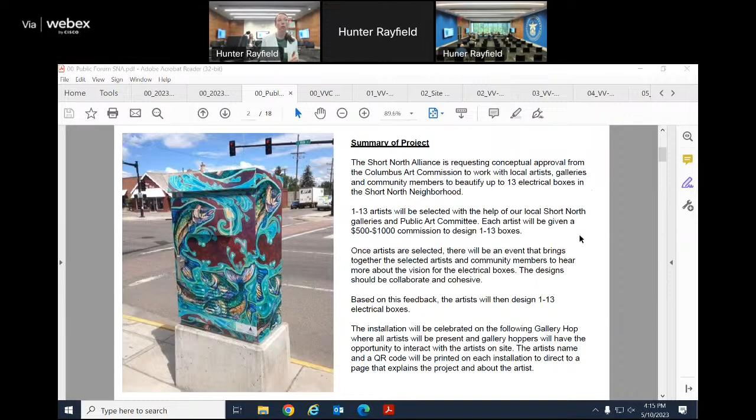We are wrapping the electrical boxes on the Victorian Village side of High Street with vinyl, similar to what you see on Parsons and in the University District. So far, we have selected 13 artists. We will match them up with a specific electrical box and have them designed for that. Then our Short North Public Art Committee will review those proposals, and we hope to install later in the summer after the Columbus Art Commission approves as well. Great, excited.

How do they go about aligning what box goes with which artwork? Here's my take on it: I think it's a wonderful idea. I think art is great exposure, but you almost want those things to go away, not become something bigger and greater than they already are.

To answer your first question, we looked at the application. We put out an RFQ for artists and got about 75 artists amongst 5 different calls we were doing, many for the out of the box project. We looked at what they've done in the past and matched it. For example, we are wrapping a box in Goodale Park, so we selected an artist that does more parkscapes and matched it there.

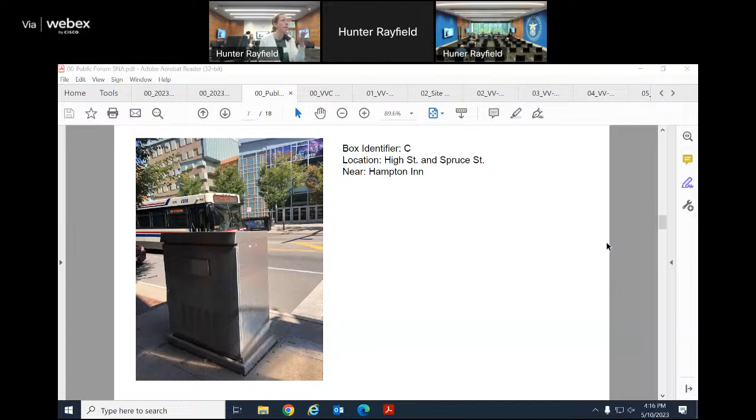To answer your next question, I completely hear you. Unfortunately, they become places for graffiti and posters and stickers anyway, and Parsons and University District have found that this is a good deterrent. People stop graffitiing and putting up stickers if the vinyl is there. It's also extremely easy to remove graffiti from that vinyl wrap.

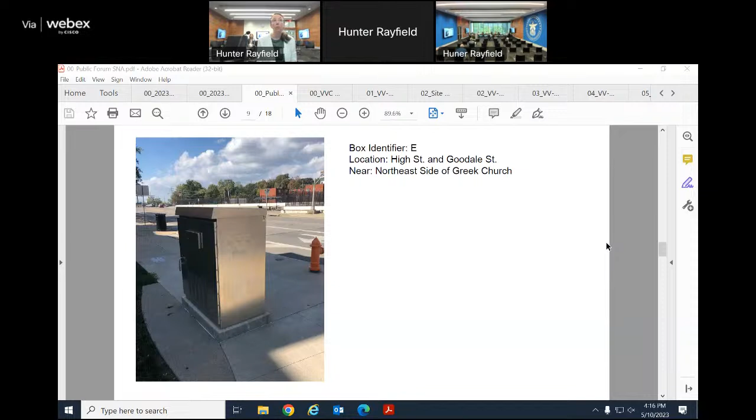Is that something that, if successful, would start to blend into more residential areas with improvements that have happened, like along Mill Avenue where several have been introduced? Absolutely. I can't speak for the city, but they've been super receptive to this project, wrapping certain electrical boxes. Some are off limits because of how they access them, but these specifically are what they've given the okay on. There's a smaller version too in the University District they've given the okay on. But I think if there was funding to support a wrap of an electrical box, the city would be at the table too.

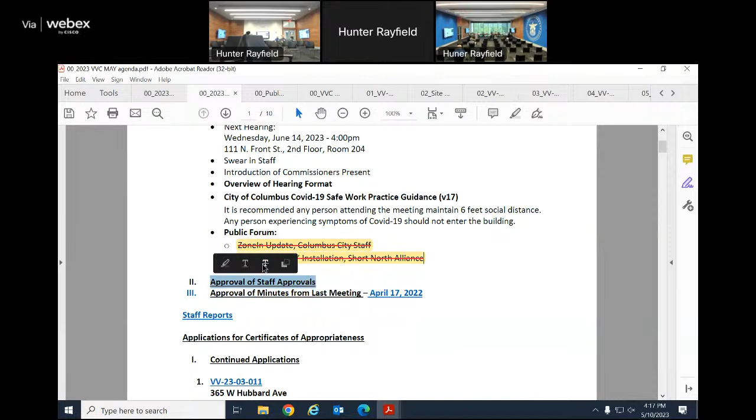It starts on page 7 if anybody wants to follow along. We start off with 781 Park Street, 773 Denison Avenue, 1132 Highland Street, and 115 to 119 West Second Avenue. That's all the staff approvals for this one.

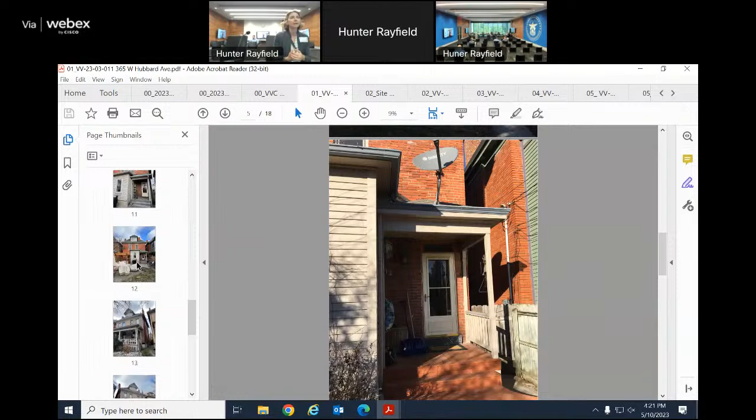Any thoughts or comments from the group? I think staff's recommendation is continuance. There was some discussion last time about its location, responsive to the addition. The addition is now considered historic as well. I think the door type needed some clarity, if I remember our discussions. I'm just trying to prompt dialogue about what we talked about in our last couple meetings regarding the project.

There's the separate issue with the roof and stuff, which is still not resolved, just to be clear. But I think we had talked about this and said, look, it's just back in the back corner, and we could maybe be a little flexible here. They address the type of door by putting in the correct type of door, and I think that's kind of where we left it. So as long as we're keeping this separate, I don't see a problem, staff's comments notwithstanding. I thought we were okay with everything, separate from that. Yeah, that's where I thought we left it.

I think the only thing needing clarity is materiality—what kind of brick will be infilled, limestone sills, and things like that—so we do our due diligence on putting in a proper opening. I don't think we really got there at that time. That's a good point. We should probably address that now, so just something to put on the table.

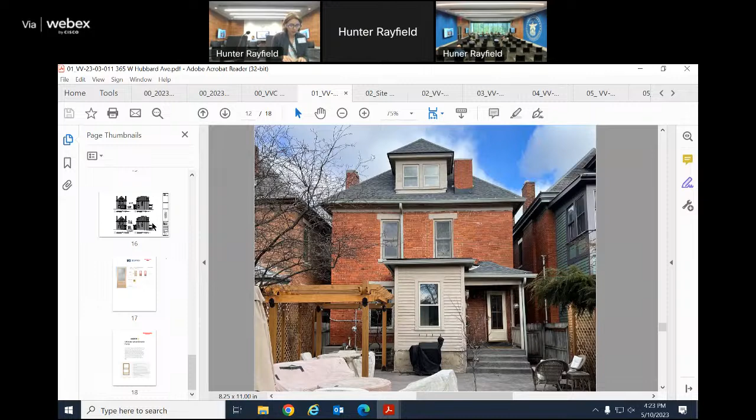Do you want me to go through the specific materials being proposed? That'd be great. So where we're taking the door out, we're installing a new Marvin Ultimate wood double hung window, wood interior and exterior, painted to match the existing. We're installing a limestone sill similar to the existing one, with brick infill beneath that won't be an exact match but will be complementary. The new door being proposed is a 3/4 light wood door. I'm not sure if they're going to paint or stain it, but I don't think you guys really need to worry about that.

Are they going to feather that brick infill, do you know? I have it shown as a straight infill within the door opening to indicate it was an opening that was partially infilled. What do you guys think about it? I'd prefer it be toothed in rather than straight. Okay, we can tooth it in. The brick needs to be close match, as well as the mortar. So I'll note that both the brick and mortar need to match, and it's going to be toothed in. Correct, and that color brick is pretty common, especially for matching.

If we're doing that, is the size of the window appropriate? I assume it's following the width of the door currently, versus if you were punching a new opening—what would the size of that window be? I'm talking about width. Yeah, okay.

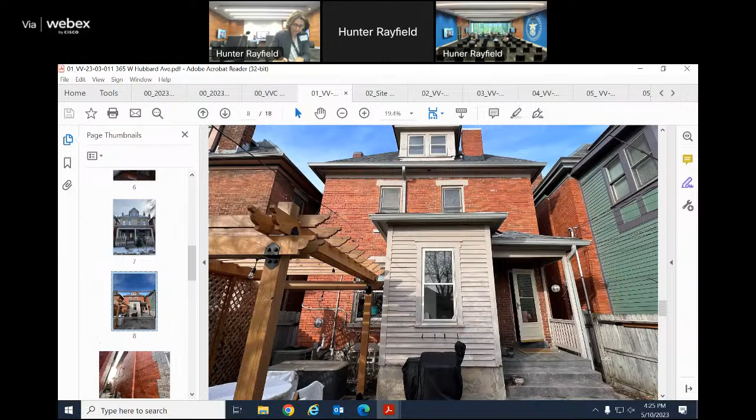All right. Kimberly, do you need anything else in terms of some of these materials for your application? I don't believe so. If it does get moved to an approval, I will need reasons why. Okay, so some of the comments made at the business meeting related to its location, the addition, the current existing addition, things of that nature, I think probably would be helpful for Kimberly.

So can someone move to a vote, or rather a motion? Motion for VV-23-03-011 365 West Hubbard, as submitted with infill brick to be toothed in to blend.

Material, limestone, she already got that. Yes, that makes sense. Is there a second? Second. Any further discussion or clarification? Is there anything to clarify reasoning?

You want that now? I was going to ask for the reasoning after the vote. Okay, that's fine, perfect. So we'll call a vote then.

All those in favor say aye. Any opposed? Motion passed. Now, I figured that would be the case, but I still wanted to go through that. Of course, no, it makes sense. So- thank you for the reasoning.

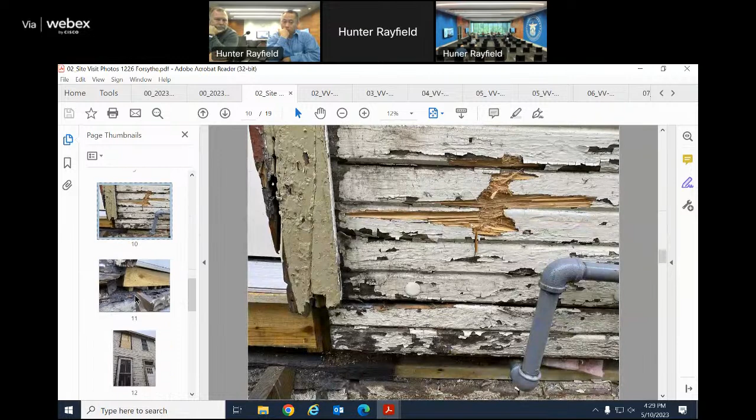gutters were previously installed on the house with straps. There was no fascia board that appears to have been present. Since the gutters were removed as part of the ongoing work at the property, would the commission be okay with replacing the K-style gutters back on, or would placing half round gutters on be more appropriate?

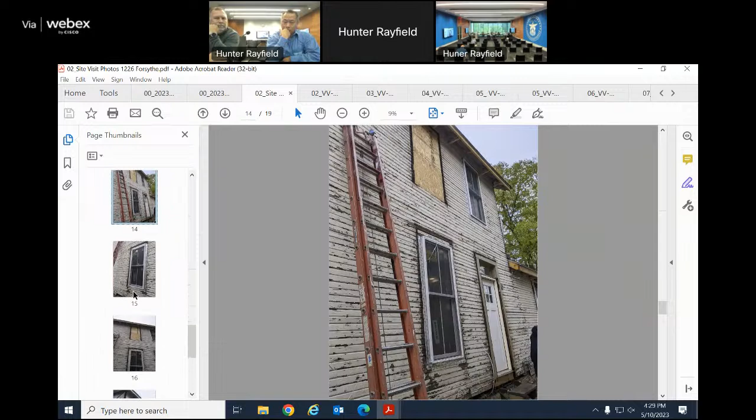Staff does recommend approval of the application with the following conditions: that the wood details on the gable ends, east and west, are retained and repaired as needed; the rafter tails are maintained in their original open condition; and the Hardie siding should have a 4-inch exposure on the horizontal lap siding and smooth finish to match the original dimensions—that's the portion on the main house.

Basis for staff recommendation is City Code 3116.11, standards for alteration, as well as City Code 3116.12, standards for new construction, and the Victorian Village guidelines on siding. That's all.

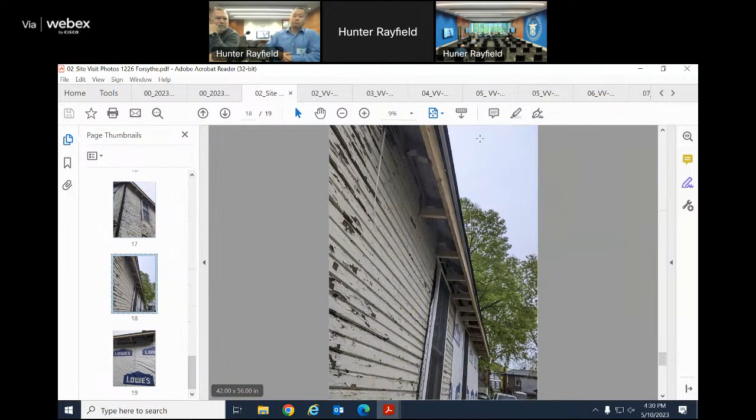Thank you, Kimberly. Can you guys state your names and get sworn in? Darren Shu, the owner. Shad Morris, contractor. Perfect. Do you guys agree to tell the truth, nothing but the truth? Yes. Perfect, thank you. Anything else to add?

It's like we're family now. We've been here so many times.

Of course. The only thing, after our site visit, that I disagree with is the fascia board and the gutters. I know, we had a discussion about it last time. That's the only thing that's really different.

With the addition being closed in with the fascia and soffit, because of how it was built, or how it was approved, it's gonna look so much different than the rest of the house if we keep it open rafters. That's the only concern as a contractor, and the way the house is gonna look when it's finished. It's gonna have two completely different looks, with the closed in soffit and the fascia and the gutters.

The only way it would even remotely match a little bit is if we did fascia on the front side, even leaving it open underneath on the top and bottom of the original house, and just putting the regular gutters. That way, at least the gutters match, and it kind of symbolizes everything matching. If that makes sense.

I'm sorry, it's kind of confusing, but it's just gonna look so much different in the front on that picture right there. I mean, that's all gonna be closed in. That's part of the addition.

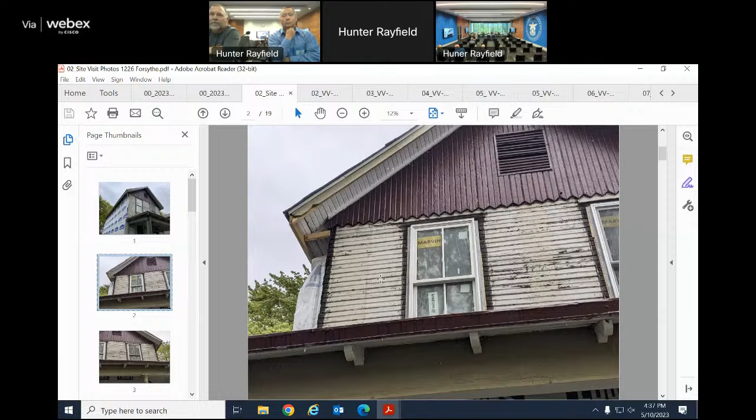What page is that? Page 5. There's 2 photos. That's 5-2. Yeah, the remote - yeah, there's the gutter, so you can see... that doesn't have a page on it. Right, that's what it should look like with the half round.

I don't know, but that one, yeah. So there's just a strap - it goes up underneath the shingles and comes down. Exactly. It's a little bit untraditional compared to maybe what the back and that addition is going to be, but I think that's the intent of being able to get that on the existing structure. Would you feel that's able to be accomplished? I mean, anything can be built, yeah.

It depends on how much he wants to spend. Understandable. So that would be the half round. All right, so siding - siding had 2 parts, one is the front, one is the rear. I think the last time we clarified the rear, it's the 12-inch vertical. Yeah, we got that worked out last time.

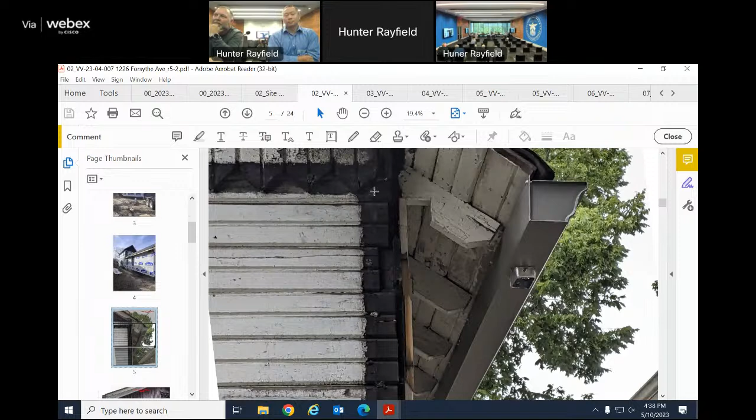Siding on the front now - it seems like from the visit, given the care, the quality, and the conditions of the existing, the recommendation has come to be Hardie board with a 4-inch exposure. So it should have the corner boards. Yes, understandable - so we have the corner boards, we have the trims. And then also, the recommendation is only thinking about keeping the existing...

...gable end siding. So how are you planning on making the transition between that without losing the character of the existing trim? We're actually going to try to cut our Hardie to match that.

That's something we want to keep. We don't want to lose that, we're with you on that.

So we'd like to try to, if we have to, just copy and paste, trace it, and cut the Hardie right up into that. Do you think you can keep the first Hardie recessed from the gable trim, meaning the gable trim would still be proud of that first Hardie board, or will you have to build that out? I think that's a 3/4 inch piece right there, on top. So I'm hoping, if not smooth, that first piece has a little bit of a ledge coming down like this, and we can get that piece up there tight so it's smooth with what's up there now, is what I'm hoping.

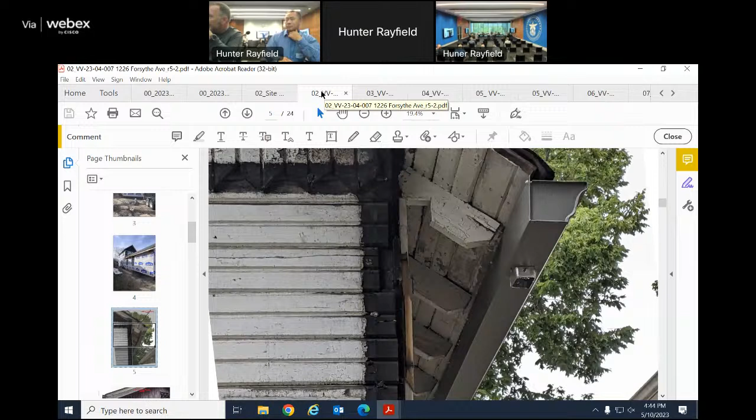I just have one question. Where, as far as how the plans were drawn up, is the break point between the addition? So where the two-story comes down, that's our break point between horizontal and vertical, right? That's correct, where the original house versus... Actually, that back part was original too, because we have to do the basement too, but I think that would be a better break point right there. Okay, I just wanted to make sure, so if I build this thing and then you guys say no...

We just want to make sure we have open soffits halfway down. Yes, okay, perfect. So, are we saying the original house is having the open eaves, and the two-story part of the house will be all regular open with gutter, but the one-story portion can be all closed? That's perfect. Thank you for saying that.

Yep, sorry, motion as well. Okay, alright, I just want to make sure we knew exactly where the break point was. Absolutely, alright, so is there a motion? Or a motion part A. Yeah, we want to start on the siding on the house. We can do that, we can break it down by A, B, C, and D. That's fine from that standpoint.

So what has changed from what was proposed? Siding wise, no problem. I think the clarity is that now we're going, based upon the site inspection, with Hardie board. But that's what's in the application, that is correct, so that would be as submitted, with 4-inch exposure, that's as submitted. I think the only thing that has changed is the addition of corner boards. Thank you so much, Melinda.

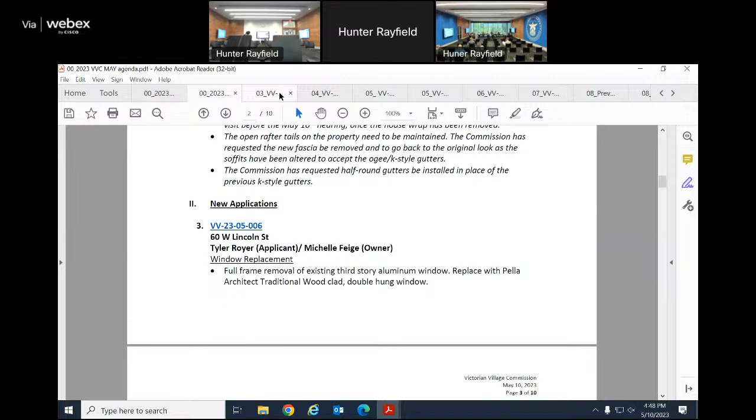Application number 3 is 60 West Lincoln Street. This application is for a window replacement, a full frame removal of the existing third-story aluminum window, replaced with the Pella Architect traditional wood clad double hung window. The replacement window would have a tan exterior with a half screen and new cedar window trims to be replaced. I've included comments from the July 13, 2022 hearing for the commissioners. Commissioners at the business meeting requested cut sheets for the previously approved window for Victorian Gate, which is the Pella Impervia.

The applicant has provided the requested documents and they have been included with the meeting materials. The Victorian Gate condominiums are a non-historic structure or series of structures which have an agreement in place, only having the Pella Impervia windows previously approved for use. The Pella Impervia windows are a fiberglass composite exterior and interior, while the Pella Architect traditional wood clad are presumably wood. The Pella Architect series reserve are the Pella wood windows that are listed on the approved windows list. Is the commission okay with the difference in materials between the two windows?

Staff recommends approval of the application with the condition that the replacement window is from the approved windows list. Basis for staff recommendation is City Code 3116.11, the standards for alteration, and the Victorian Village guidelines regarding windows and doors. Do we have the applicant for 60 West Lincoln here?

Oh man. All right, so we are coming back to number 3. Okay. I have a feeling I should have asked first. I know, it's all right. I was holding out hope.

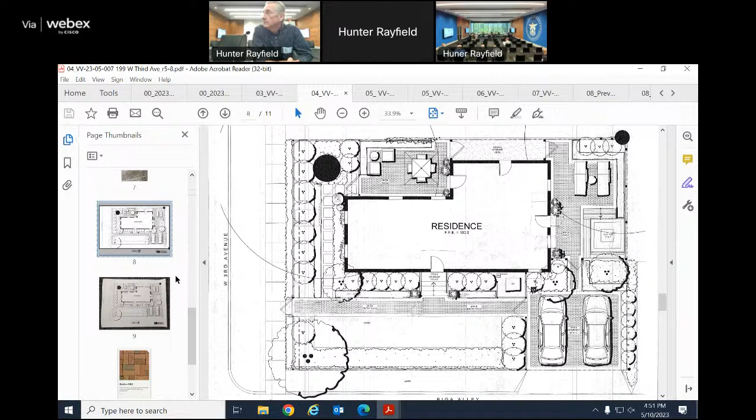Commissioners at the business meeting noted that they would like an explanation for why the mature trees were removed. Plants on the site plan should be labeled or examples of the proposed plants provided. HPO staff recommends removing the tree proposed at the northwest corner further back so as not to impede the vision triangle. The applicant did provide an updated site plan with some of the plants marked, which is the picture. And if there's any complaints about that, I took the pictures, so I make no promises on how good that was from my cell phone.

Staff recommends continuing the application to allow the applicant to provide updated details on the proposed plants. Basis for staff recommendation is City Code 3116.13, the standards for site improvement, as well as the Victorian Village guidelines on fences and yards.

Thank you. Can you state your name, get you sworn in, sir? Bruce Schumar. Do you agree to tell the truth and nothing but the truth? Yes, I do. Thank you, sir. Go ahead, if there's anything else you want to add to help us.

I don't know, do you have questions, or what should I start with? Anything about the project that maybe the staff hasn't clarified, or their thoughts, or if there's anything you feel from staff's recommendation that you need to clarify that would help us in understanding or providing our comments?

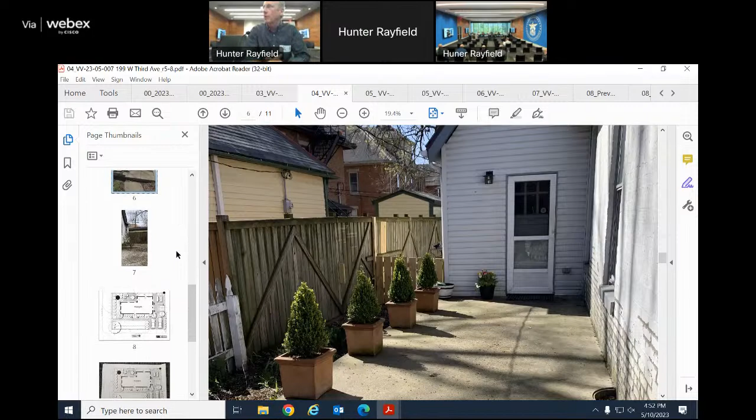Well, I have several different patio materials that I'm wanting to come up with just one patio material for. So I've got a concrete porch in the front, and the back has those 18-inch square concrete pieces. And so I'm wanting to do all that in brick. And then the parking pad, I think it's a concrete brick that's better for the cars as opposed to the gravel that's there.

Can you speak to the mature trees a little bit? Yes, sir. There were two of them in the back of the property. They are swamp maples. The one in the very front is also a swamp maple. The tree people said they're common, but they grow very fast and break limbs very easily.

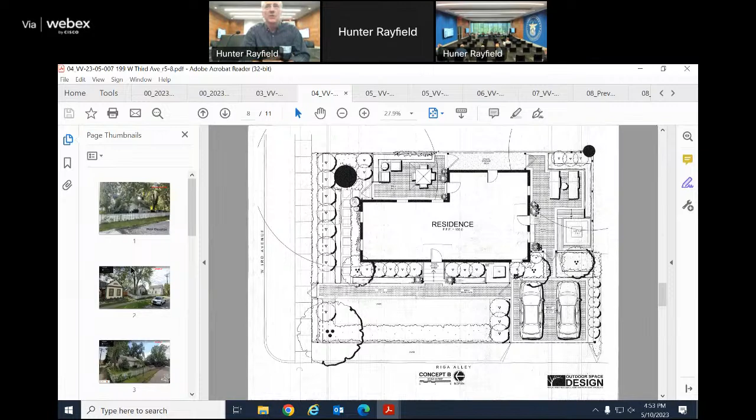So when I purchased it, there were limbs on top of the slate roof, and I wanted to get the slate roof repaired. With their recommendation, the two in the back were very fragile, and the one in the front was the strongest of the three, so we put cables in it to shore it up. It comes up as one trunk but then branches off. The ones in the back branched off lower and wider and were in much worse shape, spreading into the neighbor's yard. It was very attractive originally, like a little forest around the house, but they came down and I had the roof repaired.

I apologize, do those trees show up in anything we have? The ones that were demolished, do we have any record of that? No, I don't have approvals for them. I just want to note that any and all exterior work requires review and approval by either the Historic Preservation Office or the Victorian Village Commission, including trees. So moving forward, before doing any work on taking a tree down, please reach out to our office first. I will, and I think you found some pictures that I included, so you can see.

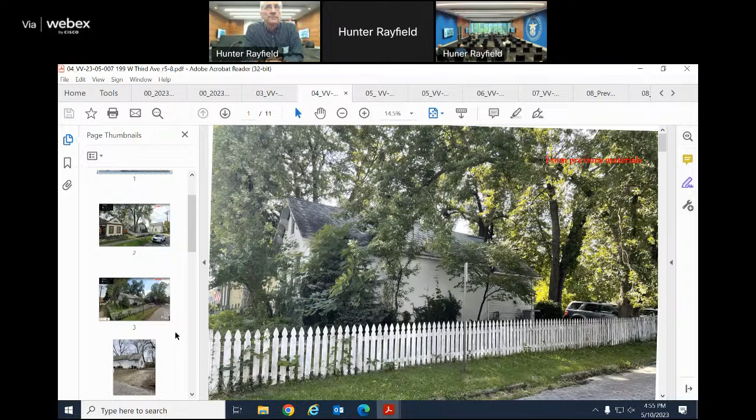Comments: we have materials for landscaping, so that's patios, and also materials related to the parking, and obviously the tree planting. Staff's recommendation is slightly shifting the one proposed tree. I think the biggest issue here is just needing more information, needing to understand what new plant material is going in.

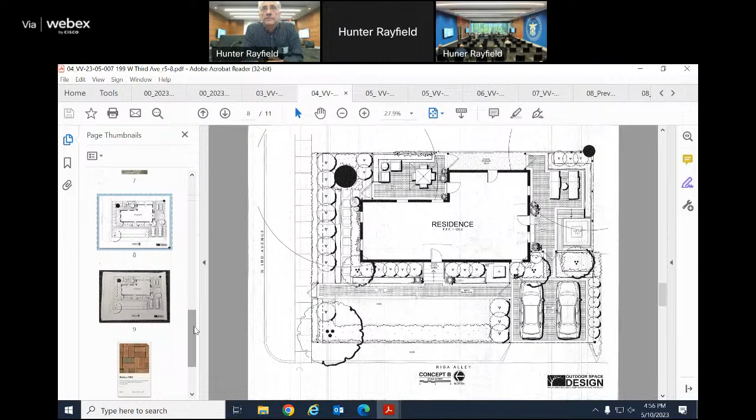Understanding the fence condition - is it being replaced at all? Is it existing to remain, or is it a new fence? I can hardly hear you. Is the fence existing to remain, or is it going to be a picket fence? Yes, I want to keep it picket, but a lot of it is damaged, so I'll be replacing sections of it. There's also a new addition of picket where it turns the corner at the cars and goes back to the house, which will be new picket to match the existing, with a little gate.

Are you on your site plan? Second site plan as well, it's a PDF - it's a picture, and if you zoom in you can see the company notes. Hunter's got it pulled up at the moment. So labels were added. Yes, I see now. Now I understand, thank you.

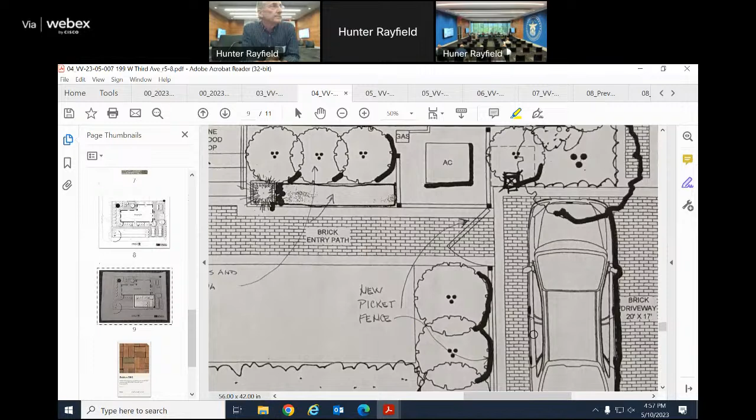Would visual examples be more helpful for the commission, like pictures of what these plants might be? I'm fine with visuals. Yeah, because we kind of have the names on them, but these are pretty standard plantings. I don't see any exotic ones.

The front of the house looks very rigidly laid out, and I'm wanting to soften that some. I do want to keep the idea of boxwoods, the sweet bay, and ferns, but it might undulate more.

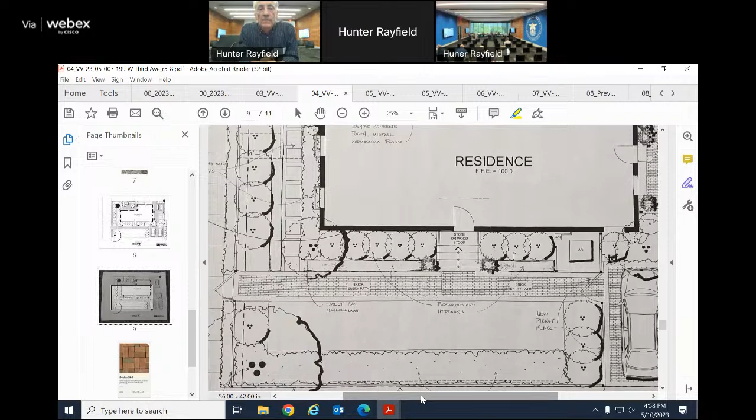Are you able or willing to move the sweet bay magnolia away from that corner? The concern raised by staff is its location, from a sight triangle standpoint for vehicular traffic. Yes, I don't want to create a traffic issue. I like having a tree in that corner, but possibly a more vertical tree.

Would that do it, or is it the trunk itself that would be a problem? It's typically the trunk, but the branching habit does come into play. Even if you were to slide it back so it's in line with the face of the building, that would probably open up that view corridor enough.

Yeah, I could slide it back, or not do it at all, I suppose. That really pins that corner of the cottage and that frontage. So, Mr. Landscape, how do you accomplish that? Because it has to make a statement, it has to end, but it has to make a corner. What do we do in those situations?

Well, in some ways it's not different than what's happening with that existing tree. You continue that hydrangea hedge to the corner and around the corner, and that would just terminate, sliding back behind the hedge. Or you could even go in the corner there, if you're willing to lose a little bit of lawn.

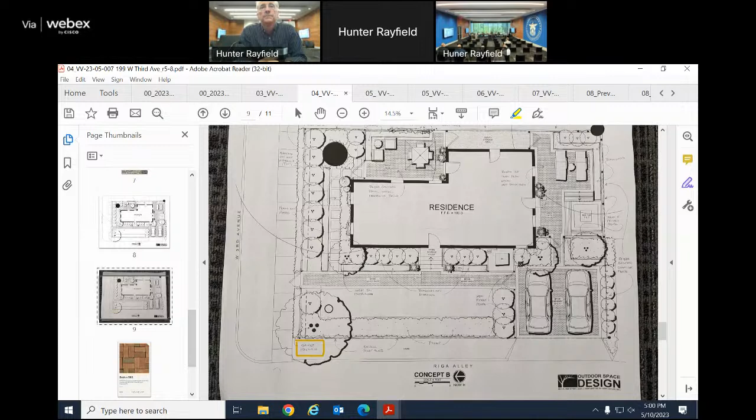You kind of frame it, and maybe take the hydrangea hedge around the corner and frame it into that new corner, so that pulls it away a little bit. That gives it a terminus that's actually very much almost symmetrical to what's happening on the east side. Yes, so they're bookends, in a way. I'm very comfortable with that.

The hot tub's new? There is no hot tub yet, it's a future possibility. But it'll all be patio, and if a hot tub shows up, it will sit on the patio, most likely closer to the elm tree, farther east, where the two lounge chairs are. If it comes, it'll go to that corner.

So you are missing the privacy fence. I'm watching it happen on the screen. That's all Hunter, he's much better at doing that.

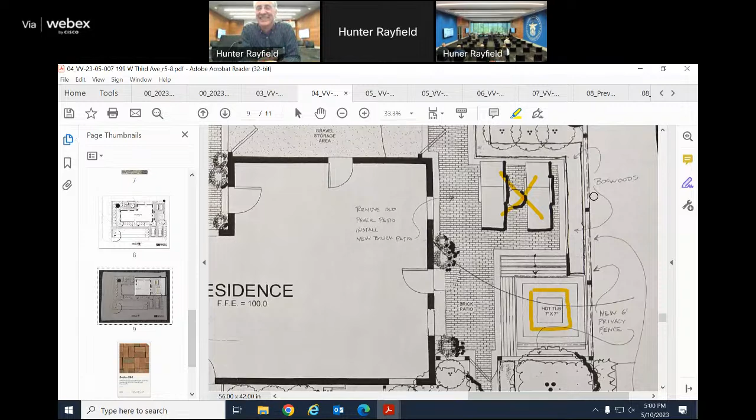With the amount of impervious surface, are we hitting the maximum that's allowed for a property this size? We might need to check with building and zoning. I would just hate for us to go through, approve everything, and then go, oh no, you've got a problem.

Because building and zoning would also be able to take a look, I think, at the vision triangle, because that follows on a little bit farther, or that might be right of way. The building and zoning department might want to take a look at this just to make sure that we're not covering too much of the parcel, because then we might need to get into variances.

So we'd take kind of a new look at it. The building and zoning department is a separate department, but they do occasionally take a look at some things for applicants and let them know, as a precursory review, whether this would result in a variance or if you're okay, because lot coverage is one of the things they're looking at. We tend to run a little bit conservatively because variances are a longer process, and they also have to be involved with them too.

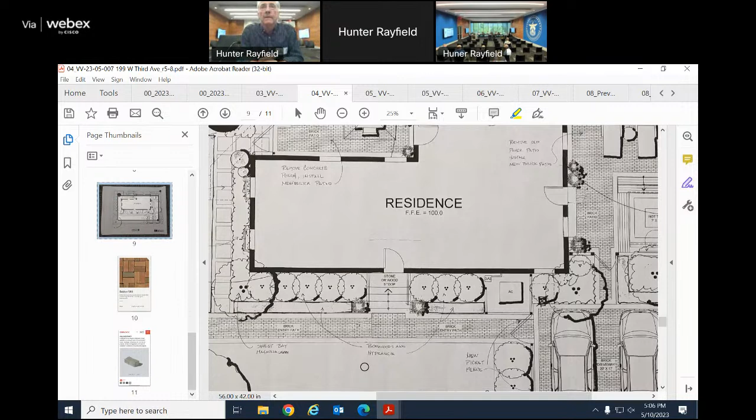What's the border material around the brick paver? Because it looks like there's a solid border. Oh, I think it was drawn as a soldier course, where they're all just lined up, same material, just different orientation. And then a hidden edging around to hold that in - with the Belden brick, there would be that plastic edging with the spikes, and you would do that in the walkway and patios both, yes.

Privacy fence - looks like there's maybe an existing portion of 6-foot privacy fence. It's about 5 foot and runs along the east side, and new portions of fence would match that. I would want to go to 6 foot on the new portion across the south side, which is all chain link right now - that whole section is chain link.

But stopping there would be the privacy fence and then no fence beyond it - I want to just do plantings along the edge. Where you drew that, it does turn the corner and go back to the house, so I have an enclosed back patio with a privacy fence around it. So there's a transition from 5 foot to 6 foot at that corner tree, yes. So that they don't actually connect - the tree is in, yeah.

I could make that other section 6 foot. I would like it all to be matching.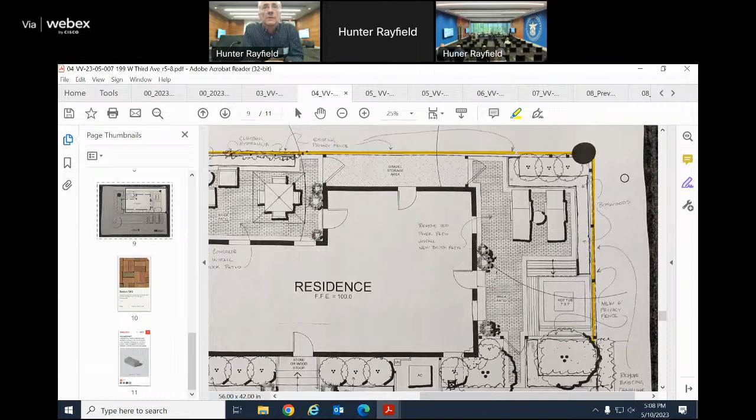There's probably enough here that I agree with continuing - giving you a chance to check in with building and zoning to make sure we're not having an issue with lot coverage of impervious surface. While you're doing that, I'd recommend we clarify a few things on the plan, then get it back in front of us so we can do the formal vote, if that's okay. So things to clarify would be the corner tree - possibly drawing its new location clearly, making sure we understand existing versus proposed sections of fence.

If not, how should I clarify that? I feel like you could do it with color, highlight it, that would be helpful. Just color in what's new as opposed to what's existing. Or you could make a little scribble off to the side if you're going to do it yourself, or if it's a separate copy, mark it up as an exhibit.

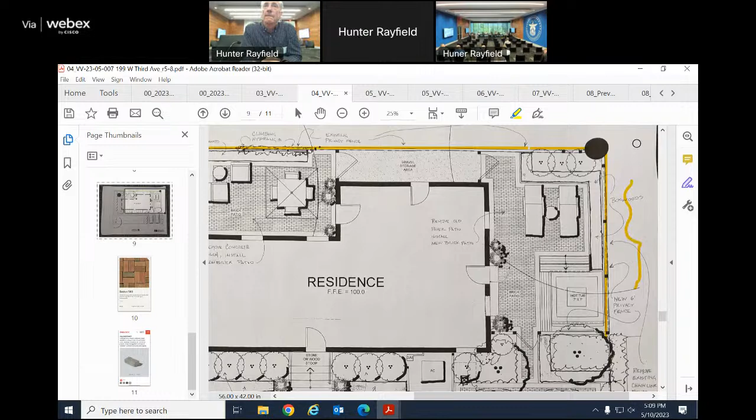And then can we also clarify if the hot tub is indeed future, what is going in and where it will be ultimately placed? It looks like around it maybe there are some steps coming. We could just go without the hot tub for now. I might just make a statement that there is no hot tub. If I ultimately get one, I could come back to you for location.

So if that is the case, just make it clear on the plan what is going in now versus what we'll worry about later.

And then on the application, did it talk about in-kind work for the existing picket fence? You talked about the existing picket fence, there was going to be some work done on it. Yes, and there'll be a new picket fence that I would build to match the existing. Okay, so that would also need to be clarified on the site plan.

I have tagged what's new and existing, but I need to do it with color, that would be helpful so you know where it stops. So it's just that one section is new, the rest is existing, and to clarify the note that the new picket fence is to match the existing.

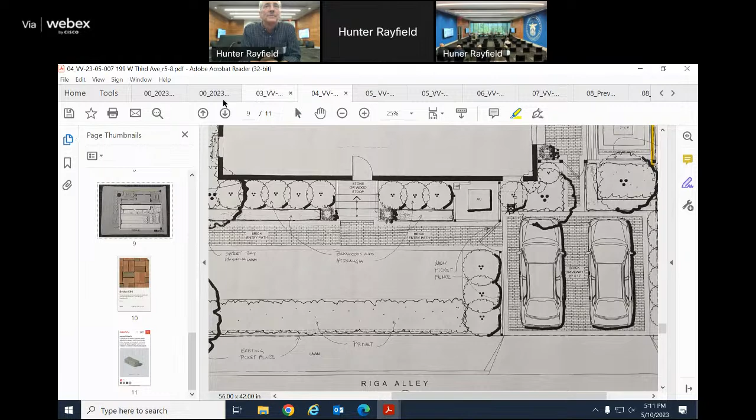Awesome, very helpful. So, is there a motion to continue? Motion to continue VV 23 05 007, 199 West Third Avenue. Is there a second? Second.

All right, just cast a vote since we've talked it through. All in favor, say aye. Aye. Any opposed? All right, continue. Thank you, sir, appreciate it. Thank you, Kimberly.

I'll be in touch. Okay. All right, we'll move on to the next application, which is number 5, 910 Dennison Avenue.

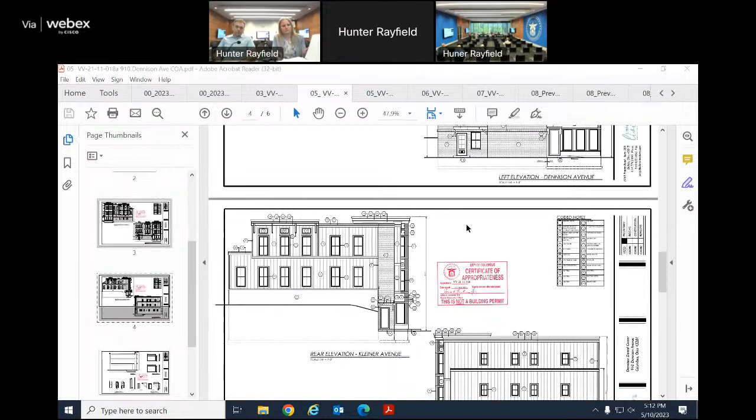This application is design changes to previously approved plans, including the previously approved floor plan adjusted due to building code, ADA requirements, and structural report. The depth of the brick on the west side increased from 4 foot 10 inches to 6 feet 4.5 inches for stairs. Windows on the north side of the southwest addition were removed. Windows on the east side of the southwest addition reduced from 2 foot 8 inches to 2 feet to allow for additional structural bracing in the corners.

Windows and the door on the south and west sides of the southwest addition were also shifted towards the center of the addition to provide proper structural bracing in the corners. Wall heights were updated, and windows on the second floor raised 6 inches, while windows on the third floor were raised 5 inches. That has no effect on the overall structural height, which remains the same.

Depth of the cantilever on the brick structure's west side changed from 2 feet to 1 foot 4 inches and no longer overhangs a portion of the parking lot. Brackets were added to provide additional support for the cantilever due to the lack of structure because of the requirements at the stair. Windows on the north and west side of the buildings were removed or relocated, with the door at the west wall being replaced with a solid 1-panel door.

Commissioners at the business meeting inquired about a lighting plan, to which the applicant clarified that there are no fixtures. Commissioners present also requested that previously approved site plans be included in the materials so they are able to compare the two designs. The applicant also clarified that much of the alterations are due to structural needs.

Staff recommends approval of the application with any and all clarifications to be submitted to staff for review and approval prior to issuance of a certificate. Basis for staff recommendation is City Code 3116.11, the standards for alteration, as well as 3116.12, the standards for new construction.

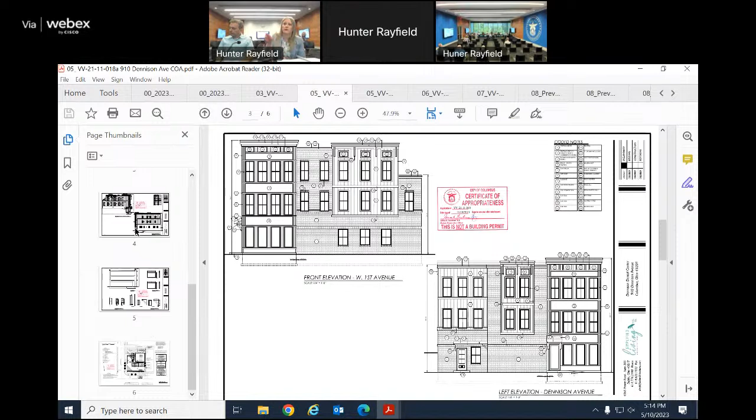for ADA purposes, with the new stair in that section on the west side of the building, that needed to extend further out. So we also had to remove some windows on the north side of that corner structure that has all the glazing in it as well.

There was also on that cantilevered structure on the brick wall where the stairs are located, we didn't want that to be overhanging. So we had to extend the brick wall out further but kept the location of the cantilevered structure. And because that didn't have the structural integrity it needs, we also added some brackets that matched the brackets already approved for the project in another location.

And then the other area, on the north side of the building, because that's connected there, there's a parking lot right there, but it's not owned as part of the build or this property. We had to remove the windows at that location just because it's so close to the property line.

Gotcha. Anything else? Awesome. Any comments from the team? What were our comments in the business meeting?

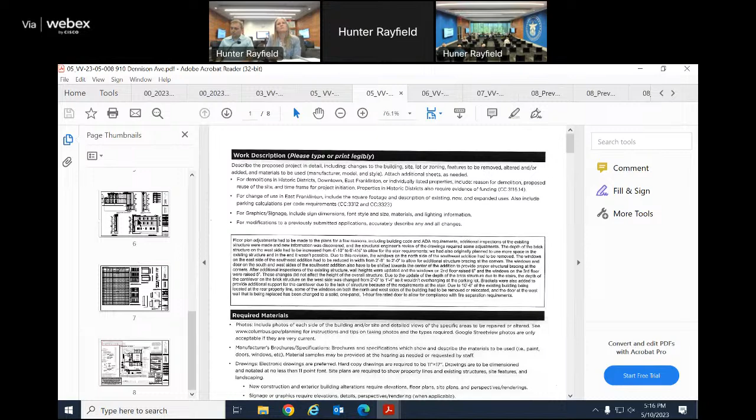You had asked about the lighting. Right, and they said it was built in. Yes, can lights underneath those porches. It seems like the spirit of the project was maintained. It seemed like, yeah, I don't respond to that here. There were minimal comments at the business meeting, because it didn't seem like materiality or anything of that nature changed.

Is there a motion? Motion for VV-23-05-008, 910 Dennison Avenue, as submitted. Is there a second? Second.

Any further discussion? Go to a vote. All those in favor say aye. Aye. Any opposed? Motion passed.

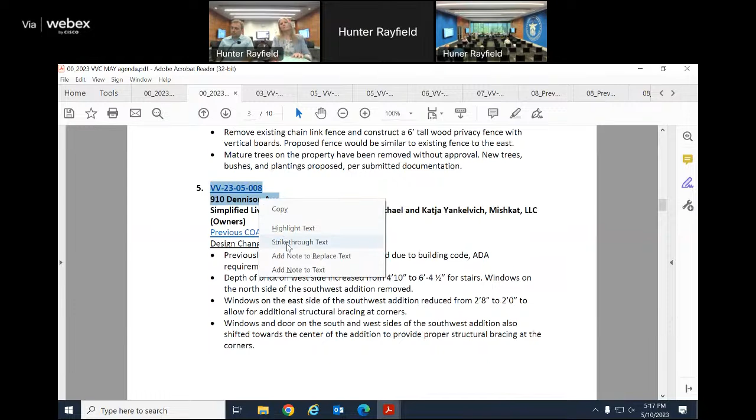Thank you so much. Good luck, you guys. Thank you for coming back actually too as well, so we appreciate it. Don't be too nice.

All right, moving on to our next application, which is number 6. This is 997 to 1001 North High Street. If the applicant would like to come up while I'm reading this one.

This application is one of two for this address. The first one being the exterior modification: adding a rail along the ramp entrances, changing the door swings to swing into the store space, adding automatic door openers to two of the entry doors, removing the existing transom and replacing with a modified transom window with a fresh air vent, and removing and replacing the entire storefront in like kind.

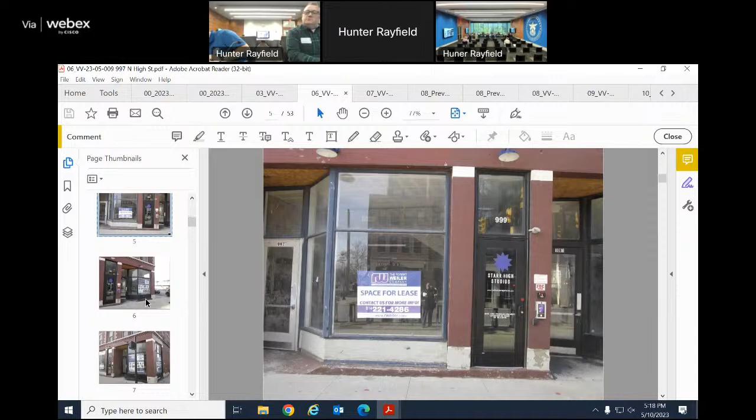Commissioners at the business meeting requested clarification on where the automatic open button would be placed and if other alternatives had been considered, such as a pad. Commissioners also noted that a windbreak would likely be needed on the interior. They also requested clarification on whether the buttons would be placed in the existing conduits, and noted that the replacement storefront in like kind would need to match materials as well, and that they would need architectural details for the proposed metal storefront to apply to the building, not just a cut sheet.

Staff does recommend continuing the application to allow for submittal of additional information. Basis for staff recommendation is City Code 3116.11, the standards for alteration, as well as the Victorian Village Guidelines on storefront rehabilitation.

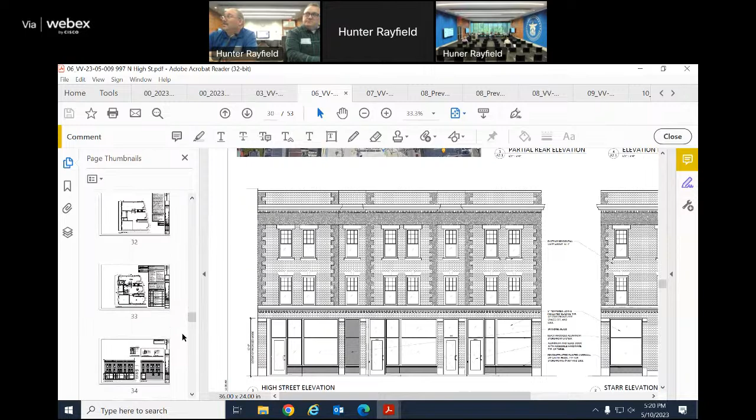Regarding the storefront itself, we already discussed with staff about the knee wall, and we're going to try to keep the knee wall portion. Ideally, the owner would like to replace the rest of the storefront with aluminum, but to do it in kind - it's actually wood now, so we couldn't do aluminum to replace like for like.

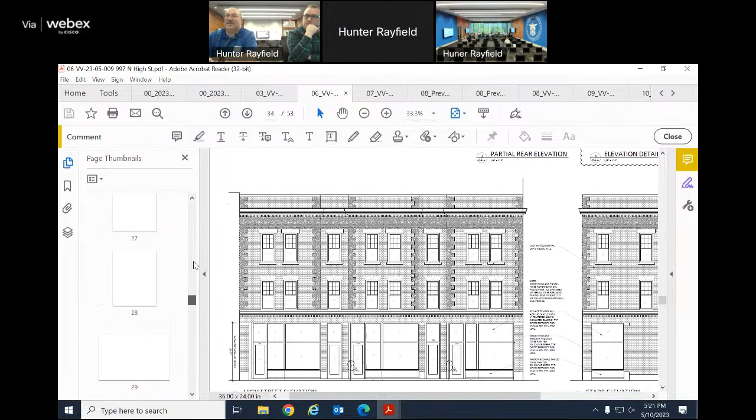I did want to point out that my drawing is not exactly the most accurate thing, but if you take a look at pictures, there are a couple of differences in the storefront between each of the storefronts and how that storefront was assembled.

The condition of the storefront is in such bad shape that they really wanted to replace the entirety of it. If they were going to do that, one question I'd ask is whether we need to actually replace everything like for like, including the profile and design of each storefront, or if we could be consistent with each of the openings and select a certain vernacular and style for each, with the trim work, et cetera.

Is that all I had to say? That's all I have. Okay.

Is there anything about that rear? Was there enough clarity on the rear? We were okay with the rear part. Okay, perfect. All right, so.

So my only question, about the access - who told you? The plans reviewer, and he took it to Amit Ghosh, and he's the one that suggested we do what we're proposing. Wow. So is the occupancy inside less than?

Yes, the occupancy for both of those spaces would be less than 25, I would say. Yeah. That's amazing - that's why we can swing the doors in. Okay.

Would you be able to share understanding of how that installation will work? So will we have any exposed conduit? No, on the exterior it's supposed to be wireless. Wireless. Yeah.

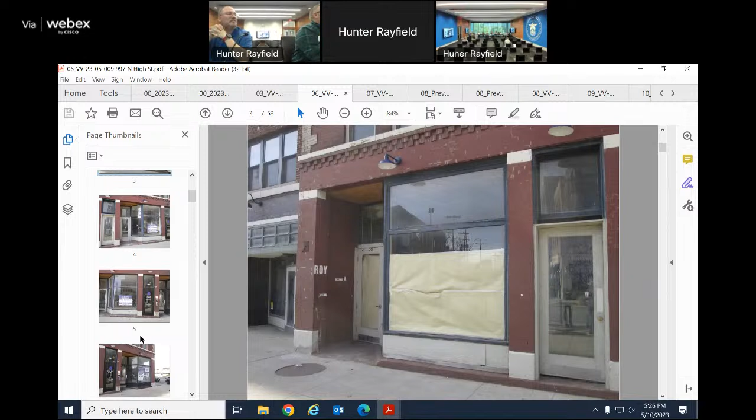We originally had also thought about how the doors inset on each one, that's the reason we've hit the hiccup on the whole ADA thing, because they're recessed from the front of the building and have a ramp. We initially wanted to bring all that forward, make it level with the sidewalk.

So Kimberly, you might want to do a little bit of history poking. What did we do in the old furniture building that is now Marcella's? That was 601 North High Street. I was just looking at that file, because that would be a good one to look at as far as material and what they did.

Historically, most of these guys just go in and have a carpenter repair their individual thing. But that project individually, I'm almost positive those were new storefronts. So you might want to check on that.

Okay, I can also ask Jamie. Jamie probably would know, she probably staffed Victorian at that time. That was probably 3 kids. He probably doesn't remember, but you know how that goes. You don't know yet, but you will. Good reference, that's a good reference. So I can supply the files for 601 North High Street.

All right, well that series, it's almost the same sister building at the other end of the Short North, but it was on the corner. It has that first floor that was different storefronts, and above that, it's all the same.

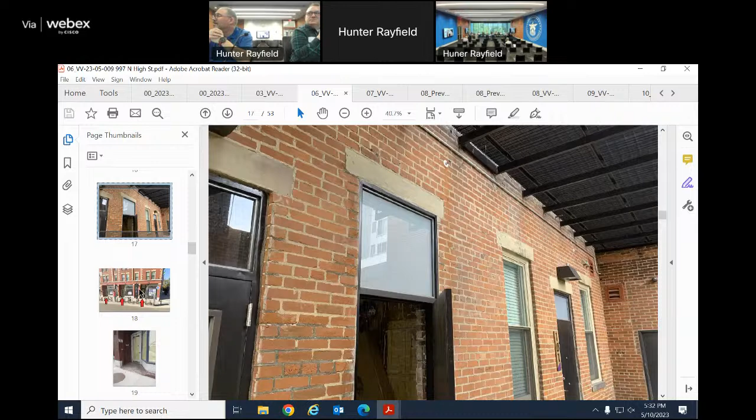Just a point of clarification, do we cover that? Is that considered an exterior feature? I think it might be considered interior, but we do have purview on the signage on the window. Well, no, it's an integral part of the door that you're replacing and it's within the view of the window. So if we built a wall that was part of something inhibiting the view, would it be allowed?

I think just kind of thinking about it too, as we have this dialogue, we should clarify. I was going to say, yeah, okay, I think it's about - it's part of the door. That's not - I think that's a reason.

But I think also, guys, it's a little bit of education for us too. So if the building department is asking for these things, there probably are going to be other properties, and so there may be an understanding that allows this process to educate us a little bit too, of a solution that could work in this kind of condition. So there's a bit of exchange there, and it could be helpful if we were to share that cut sheet as well.

Because the ventilation piece on the back door is beautiful. Yes, that is.

You approve that. So is there a motion to continue? Motion to continue VV 23 05 009, 997 North High Street. Is there a second? Second. Vote, all those in favor say aye. Aye. Any opposed? So motion continued.

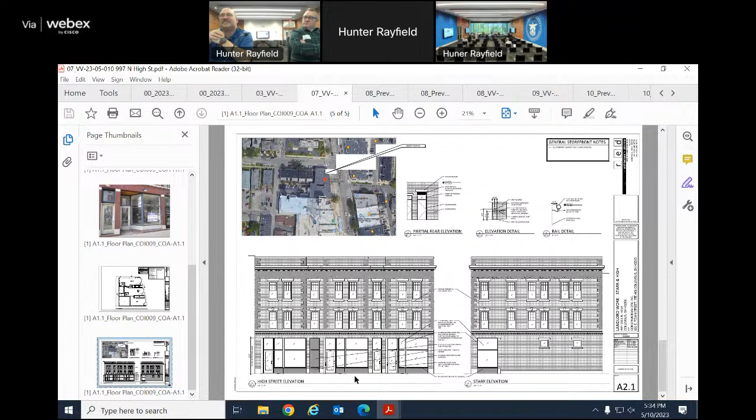Application number 7 is conceptual for the same building, to remove the historic door and transom along the storefront, install a knee wall and storefront to match the remainder of the elevation, and apply an opaque film on the interior of the window to prevent visibility into the space. Commissioners at the business meeting were not in support of removing and replacing the door to match the remainder of the storefront. HPO staff has advised retention of the door and installing drywall over the interior opening. Commissioners should offer design feedback to be used at a future meeting. Basis for staff recommendation is City Code 3116.11 standards for alteration, as well as the Victorian Village guidelines for storefront rehabilitation.

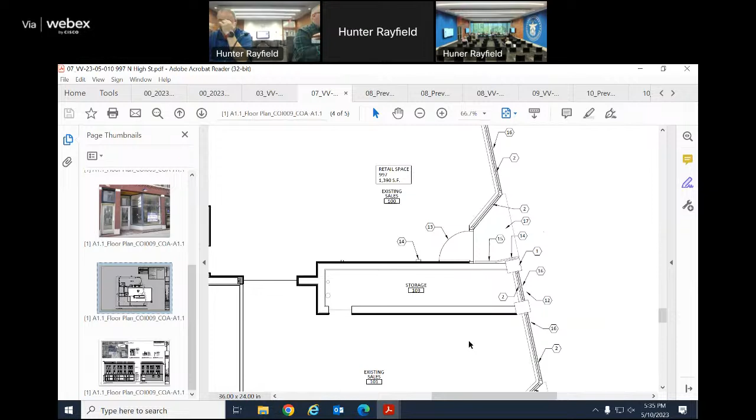The door in question used to be the main entry to the apartments upstairs before they were renovated. Now that door goes nowhere - it's going to go into what used to be the staircase, which we're assuming will become a janitor closet or something. So the door will have no purpose really, and it's not wide enough to use as a main entry or any entry, to be honest. So if we rebuild the storefront with a knee wall and whatever you guys approve as far as the windows and framing, we just wanted that to be consistent across the front and match that as well.

Because there are new doors that go to the apartments that are all aluminum. I was going to ask the same thing - there's a certificate of appropriateness for aluminum door. Are they on the rear? No, they're right there on the front - see, one black one, yeah, with the transom.

It was approved because we originally proposed to get rid of the transom, and you guys said no, you wanted the transom, so. But yeah, that's all aluminum.

I'm just curious, because I think a lot of us are maybe new from that perspective too. Was that done in '19? So that work, those doors that are the lighter color - all of those have been replaced.

No, it's the black one. Not the... gotcha, okay. So that door and that transom are all aluminum. Okay.

Got it. So I think what's important to this is those two, go back to the front facade - the full facade. These two things, whether they're used or not, both speak to the openings, as we're going up to a second.

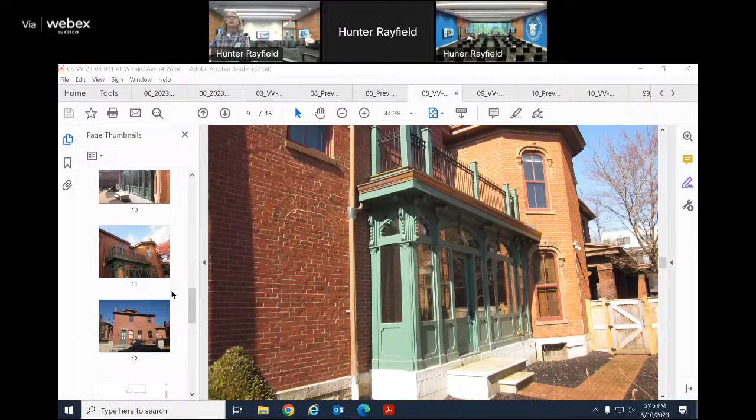Then we extended the porch so that we could wrap around that elevator and get that to appear to be less important on this elevation. So the whole goal is to try to take this sort of big chunk of elevator thing and wrap stuff around it and push it back. So that was the goal between 2020 and now.

And there was a comment about the rear windows not lining up, and we fixed that. I don't know if we can reuse—which windows were you talking about reusing? The ones with the curved top? Yes. We may be able to. I don't really know what the condition of those windows is, but the goal is that we are bringing them back on the addition.

Porch windows? These windows on this rear elevation—if you see the new elevations, we've shown windows like that. There's so many different eras of this house, it's like, which parts should we be addressing. Those just seem like interesting windows, so it's a good thing to just use them again.

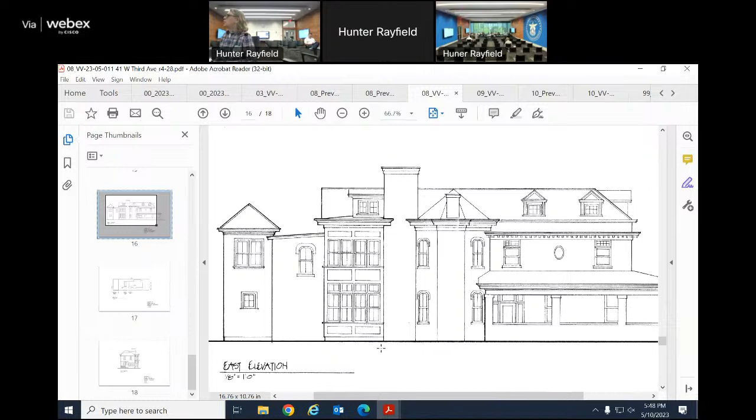So would that match the detailing of the one that's there? Well, Kimberly, what date is on that elevation? 11/22—there are new ones, hopefully, that you have. Those are the old ones. We're planning on using the brackets, or recreating those brackets. Those were all created like in 2009, maybe.

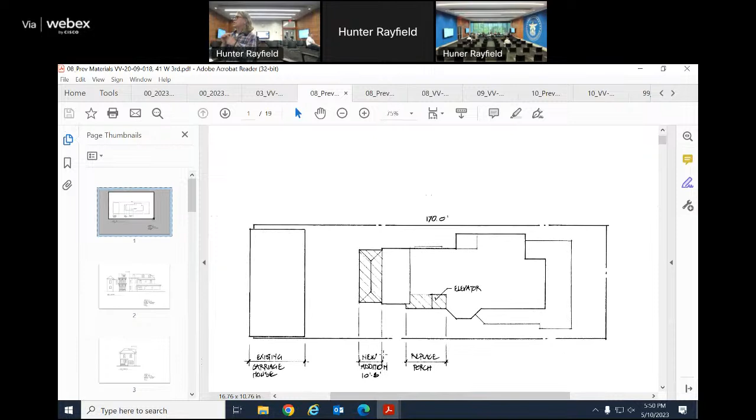So then there's also a new site plan that shows how that porch element projects past the elevator piece, and the elevator sits back behind the bay. So that's not the right site. Yeah, we have a lot of drawings of this. That's the right floor plan. There it is.

So, yeah, I'm mostly here to make sure that with the changing of the commission, we're still on board, and if there are other comments that we should be addressing. I think that's why I was trying to prompt it. We had a little bit of discussion on materiality at one time and stuff like that too, if I remember correctly, so I was just trying to get that out there as well.

So, yes, and so I didn't get the answer completely—so the new two-story porch would have a similar look to what's currently there?

Okay, but materiality is not brick, right? I'm referring to the porch—what is green now? Yeah, whatever. The elevator shaft would be brick.

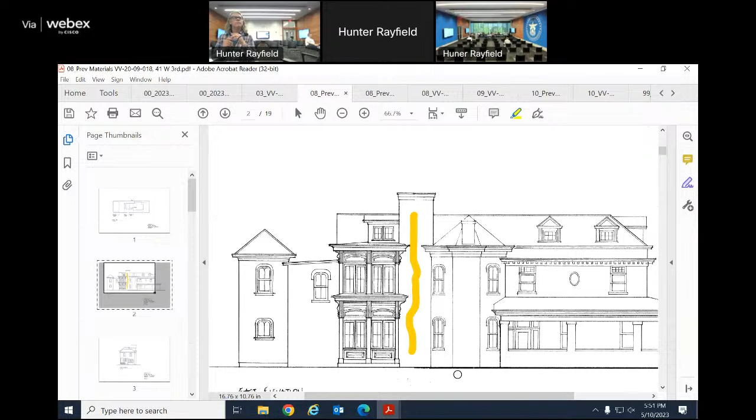Is the elevator serving the attic? Is that why we have that dormer on there? So there's also a new stair.

Currently, the stair goes from the old part of the house—I think there's an Italianate house under a front addition—but the stair currently goes from the part of the house with the dentil mold up backwards through an attic to get to this space.

And we wanted to be able to access it directly from the back stair, and we needed to get from the elevator into that space. So we needed to bump that up a little bit.

I think a section through that porch and a section through the elevator, long term, would be helpful. For conceptual purposes we don't necessarily need it, but so we understand—because there's a lot going on right there. Yes, and that would be part of what we submit.

Anything else, Melinda, that you think you'd need? Just confirmation on the height of the elevator shaft, because depending on whether it's a through elevator or a Lula, how tall that needs to be—it's really tall now. I would hate for it to get in the way.

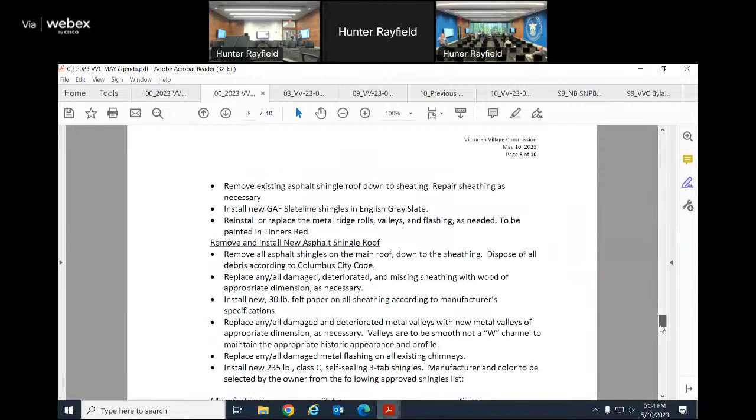Just thanks for switching my washing machine—very confusing, maybe, but I don't think it's that bad. My washing machine doesn't have Wi-Fi. The same thing—I thought that was a ridiculous feature. Oh no, I'm completely addicted to that. My husband and I talked about it, but like, why didn't this exist years ago? Why did dryers and washers not have Wi-Fi? Here we are, now they do.

Why? Because the electronics or the motherboard, which is always replaceable, catches on fire when your house burns down because you were too lazy to go home and turn your dryer off. Yeah, I don't think I can start it remotely, but it pings my watch when the load is done, which is good because it's in the basement and I don't hear it. If you're old enough, you know—never, ever turn your dryer on unless you are home.

I know, yeah, that's a good point. That's why I was confused why the washer said it was done and my husband should be at the dance studio with the two kids, because they're in dance class.

Some of these new appliances, you need a PhD. Yeah, it's supposed to make it easier—isn't it supposed to make it easier? But come on, folks, really, 22 cycles? Let's be honest, I mean, I use like...

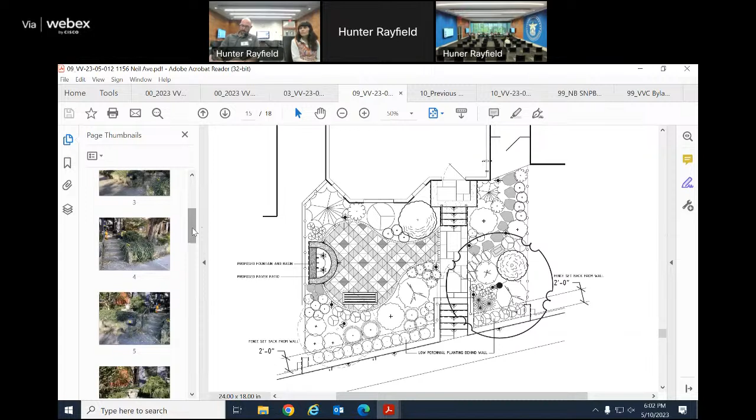The commissioners should offer some feedback that can be utilized at future meetings, since this is conceptual. Basis for staff recommendation is City Code 31.16.13, the standards for site improvement, as well as City Code 31.16.11, the standards for alteration, and the Victorian Village guidelines on fences and yards.

Thank you, Kimberly.

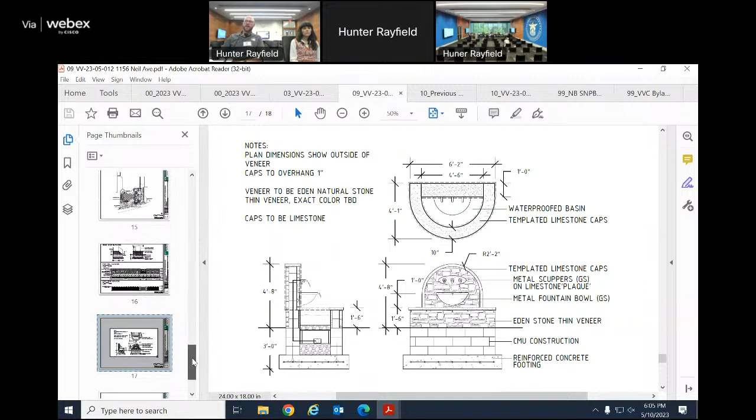So we did try to adjust the fence location and bring it back off the wall, trying to work with some of the requests from earlier hearings last year. So we did try to do that as well. The patio was always an idea we had. I tried to arrange the pattern and colors to maybe be representative of kind of like a Victorian tile.

I understand there's not a lot of those, maybe any, in the neighborhood. Actually, our next door neighbor's front porch has a tile like this—it's definitely original. So that's where we kind of got the idea from.

That was something we decided on early to try to be representative, but if a paver patio in general was going to be a thumbs down, we were going to look at the option of flagstone with gravel joints, if that would be more acceptable. I know Christina isn't into the idea of gravel or aggregate only, so we didn't know if there was any wiggle room on the materiality to fit in better—maybe not a solid paver patio, but something in between, if that would be acceptable.

I think that was basically it, yeah. So let's just open up for comments.

We want to talk about the retaining wall first. Again, I think we were just trying to get clarity—are we okay with the retaining wall? I think all of that has been clarified, more so with the fence, because the retaining wall has been approved.

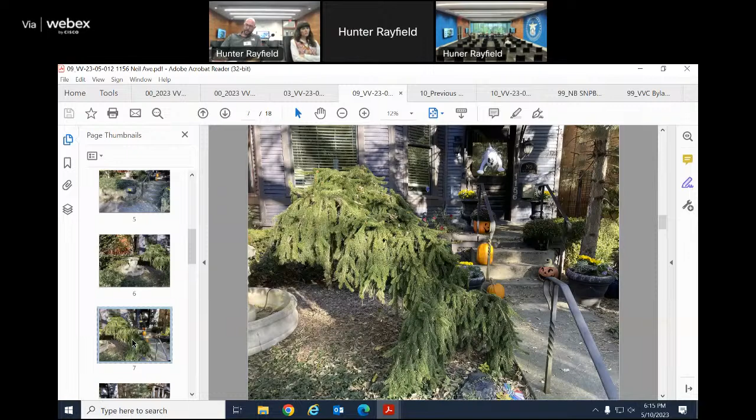Cool, no that's very helpful, I appreciate it. And the fountain piece, I think the scale of what's there now is much more appropriate than the scale.

Proposed is very one-sided. So what is the backside of that? What is the view, because that's kind of a neighborly thing there, you're kind of creating a wall that they're seeing.

So I think you just be careful about what that vantage point is. And I was happy with the fountain design. We did scale it back quite a bit to where the actual vertical element was more concentrated in the center, where it actually rose up.

So we at least tried to be respectful of that, because I understand you don't want to just have this masonry wall right on the edge of the property. But we also thought about just omitting it from this discussion entirely, because we didn't think it was really gonna fly. It was trying to create something for the ambiance of the noise, but also to make something that was a scale that would be able to have the features that we could.

I like the Bride's Garden at Columbus, the conservatory. So that's basically what this was designed, kind of the inspiration from that standpoint. We tried to keep it all pretty low except for that back part, showing how it's just that 1.5 foot height, except for that 4'6" section in the middle, which does rise to a little over 4'6".

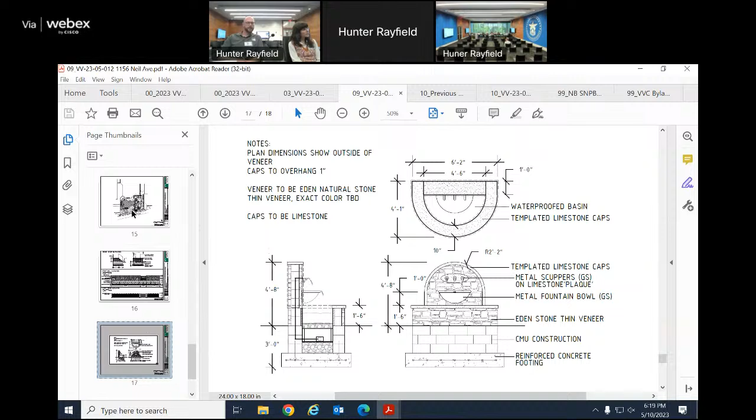From that perspective. So, do you think the fountain that we currently have, which we did not purchase, is that even consistent with Victorian? I love that fountain. You do? The next question I was gonna ask is...

It's cracked, it's not fixable, I'm sorry. We tried to fix it and reseal it, but some of that is how it's constructed, all concrete. It's old, not waterproof.

But I mean, I love that fountain. I think it's simple, it's the right scale, it's appropriate, more open, I guess, as far as any way neighbors look at it, being it's incorporated however and wherever your perspective is.

We love the fountain too. And sorry that because of its size it can make a lot of noise. Yes, I mean, and actually both our neighbors really like the fountain.

Yeah, just bring that up. I would strongly encourage trying to see what else you can do, more in that vein versus what's proposed. I think you'll have a lot easier time getting us to all agree on that versus the one-sided sort of approach that's a little exclusive to that space, though it makes sense.

What's proposed isn't a bad design, it's just... Yeah, I don't take it that way or anything.

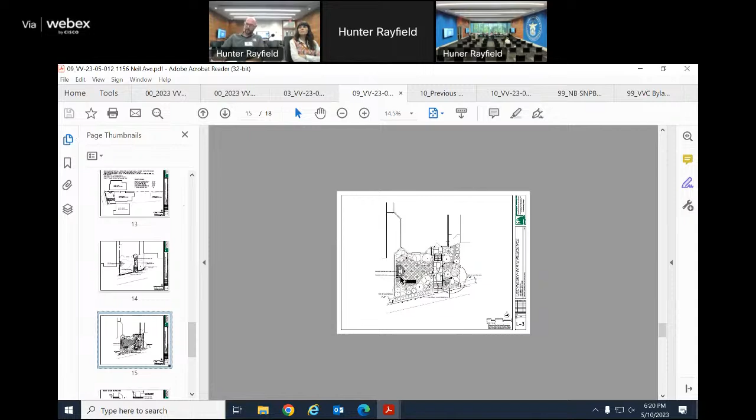The only other thing I'd mention: looking at it, there's a bench right now with its back to the street. Just thinking about that, and especially that if it's furniture it's not really our purview, but you have a fence, then a retaining wall, then a hedge, then a fence, then something even possibly taller than that. It's all these walls.

Yeah, I guess it's more of a placeholder, but I get what you're saying, and that area was opened up more to allow for furniture. So maybe closing it off a little bit instead. But do you want to sit there people-watching, which means facing the other way, or do you want to sit there and stare at your house? Which maybe you do.

Honestly, we'll sit in the backyard, but I walk to work every day, so I'm in the front yard multiple times a day, and it's really a visual thing. Currently our front yard looks pretty awful, honestly, so we'd like to improve it.

We thought about the idea of photo opportunities for the kids, and areas for pictures, sure. Framing it a little bit, but yeah, it makes sense. And we're flexible on all of that.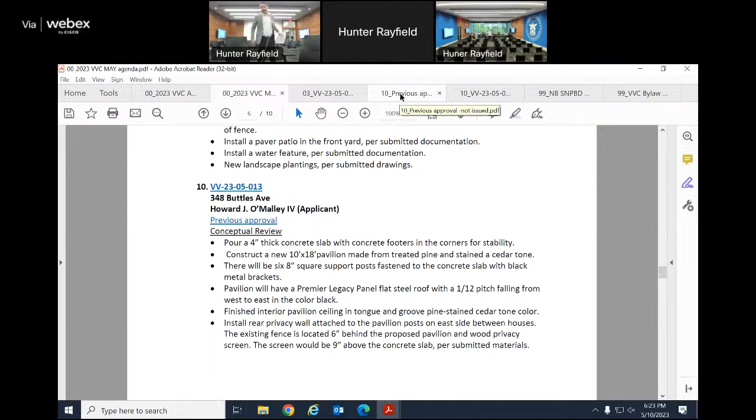So this is the conceptual review: a 4-inch thick concrete slab with concrete footers in the corners for stability. Construct a new 10-foot by 18-foot pavilion made from treated pine and stained cedar tone. There will be six 8-inch square support posts fastened to the concrete slab with black metal brackets. The pavilion will have a Premier Legacy panel flat steel roof with a 1 to 12 pitch falling from west to east in the color black.

The finished interior pavilion ceiling will be tongue and groove pine stained a cedar tone color, and they'll install a rear privacy wall attached to the pavilion post. On the east side between the houses, the existing fence is located about 6 inches behind the proposed pavilion, with a wood privacy screen 9 inches above the concrete slab. Commissioners at the business meeting requested that choices on the cut product sheet for the pavilion be marked.

They also noted that the proposed design is a little too rustic, and they considered it suburban. Out of the designs on the cut product sheet, they found the Highgate design most appropriate, but would not support the vinyl material. There was concern about proximity to the lot line in the original house, and a scaled measured site plan was requested.

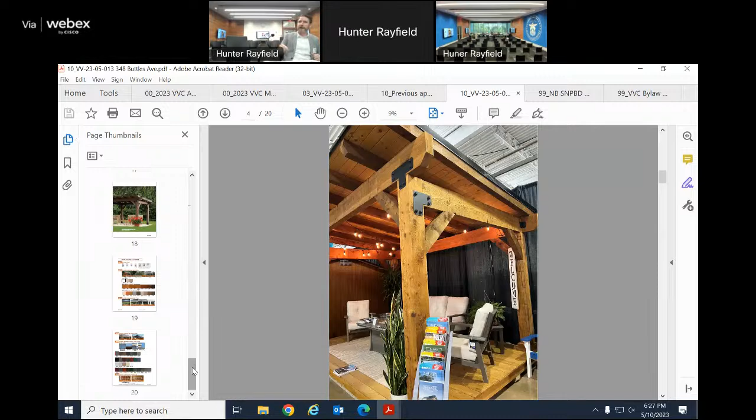If you look at my backyard, maybe you could page back to there. The rear door is elevated, obviously, and when you come out of that side door, this pavilion is right to the right.

So this design allows for it not to be weird. When you come out the back door, it has to be high on one side and sloping down this way. The hipped roof pavilion I had approved in the past, you either have to put it way up in the air, very strange, or when you come out of that door, it's like chin high. So because of that door and the elevation, which I cannot change, this design is the only one that works.

In my opinion, I've looked at all of them for many years. When you come out of that door, you really have to have something high enough up so that you're not looking at the roof of, like, a standard hipped roof pavilion that I've seen other people in Victorian Village have.

So the design's a little modern. But again, for me and the way the backyard works, and for us to utilize that back corner, which was just mud essentially because I can't get grass to grow there, there was no paver patio there at all.

This pool is probably 50 or 60 years old, that's in the ground there. And yeah, so that's another look at it.

So I can never, basically, if you see the edge of the existing concrete, you can barely see it, but that corner has a concrete edge, like everybody else has around their pool that's been there for a long time. This new concrete slab would mesh up right against that, to be level.

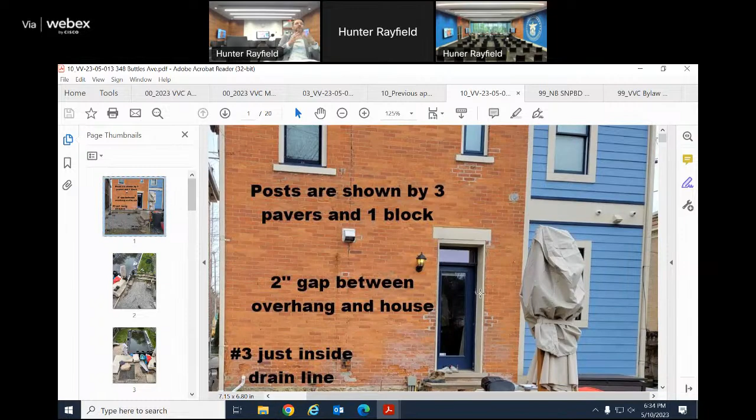I bring it up in the context of maybe challenging the location of this pergola structure. As a garden structure, it would feel better to me towards the back of the lawn on the other side of the pool. But I'd want to put it back there in case I need parking spaces—they're building a giant apartment complex across the street from my house, so I don't know what parking is going to be like. I might need to put parking spaces back there. I don't want to, but if we can't park any longer, we'll have to do something. That's a different conversation though, so I didn't want to spend any money back there until I decided what I was really going to do.

So where are we at? I was trying to figure out, for one element, it's like you have the door. So is this element a garden element by itself, and it doesn't address the door? Or is there some way to address it architecturally—this is how I see it, you know what I mean?

There's a building, there's a garage building—if it's bigger than that, there's a pool house. So a pool either has one side dedicated to seating, and it could be lawn or garden on the other side. That's kind of where you're building. The thing that mucks this up is the connection and closeness to the house that you're trying to obtain throws the whole thing off.

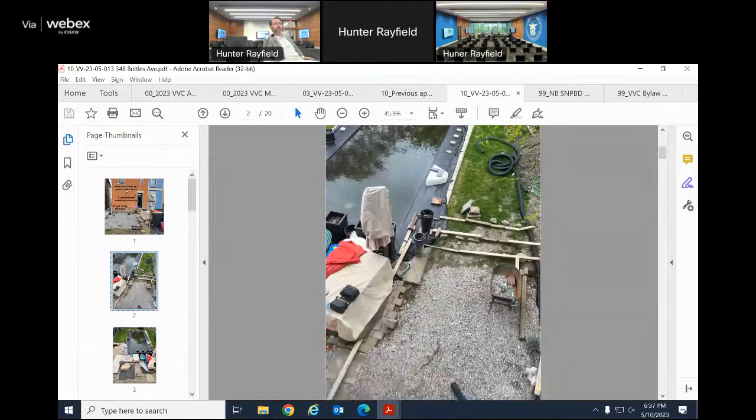Okay, so let's go to the drawing. Here's my signature—I mean, it's like we're deliberately trying to address its awkward relationship to the house, and that's what we're trying to work through. Yeah, but I needed it to be usable space. And Jeff, you brought up the pool as an interesting thing with this property—this thing is kind of, in my mind, addressing the pool. Right, I almost see something much more long and linear, a trellis kind of garden-like thing that follows.

Well, I'm also blocking the Section 8 building next door that's three stories high and looks right down into my property. So that's why there's the solid roof—it's a privacy issue. Would you still be able to... I guess, understandable.

So I think if this thing wasn't so room-like in that kind of end—if it was more linear and still had some sense of cover, but addressed more, I want to say, the fence line. So it could still have solid cover, but thinner, you're saying. Yeah, more long and narrow—it's about the pool, not necessarily trying to shove it into this corner between the pool. And you want it more away from the house, huh? I think it would just offer you a little bit more flexibility.

It is a weird setup though, because I think we're not getting the context of how thin the yard is on that side. When you put these posts and they're not on that concrete pad, you're really narrowing the walkway there. It doesn't make sense, because I had the idea of this being an outdoor room where we could have seating underneath it that was comfortable, a shelter - not that I'm going to be out there in the rain, but my patio furniture and things like that could sit underneath there. That was the use case versus just something to walk under. But if we get it that thin, I really can't fit anything under it.

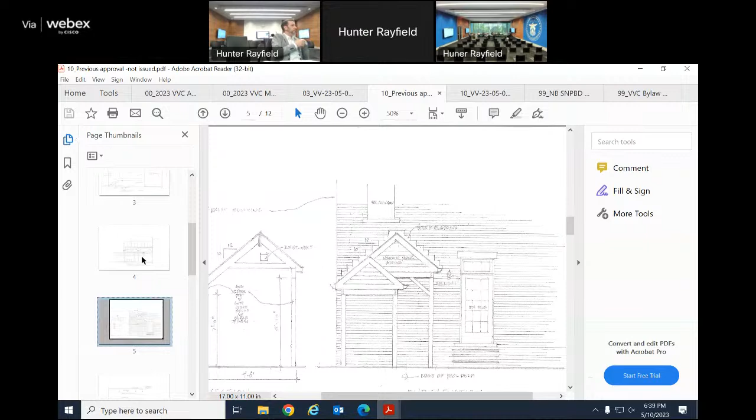So can we go back to that original drawing for just a second, the transition, because this is the big thing - this was the transition from above to ground level. I'm not so sure that isn't something you need, because if you're going longer and linear and a little more rough, you're still going to need that transition element to the house, and I don't know what that is. Either it doesn't touch, or it does, or it's farther away, or it attaches, or there's a design intent in that piece that connects and makes sense with the other piece.

I don't know - maybe that's a better look at it, because the wider part, like you said, was... if I understand, I'm trying to remember how we had this, I forgot, I gave up on it. But the weird part was when you come out of the back door, that side roof was almost cheek high. If it's not, it looks like it's really on stilts, really tall. Even with 8x8 posts, it looked really weird. So I think what we were doing there, the wider part was attached, and then he had it going smaller and more linear, thinner, off attached to it. I think that's right, if I'm looking at it right, or maybe I'm not.

I had an architect that designed that.

But either way, I suppose that's not... Yeah, because what's really interesting about this piece - it really wasn't that wide to put anything under. Right, but I don't know how far that was out, or was that running the whole length to the garage? No, not the whole length. That fat piece was coming like almost to the pool the way I have this now. And then that little extension was coming out, but not that far.

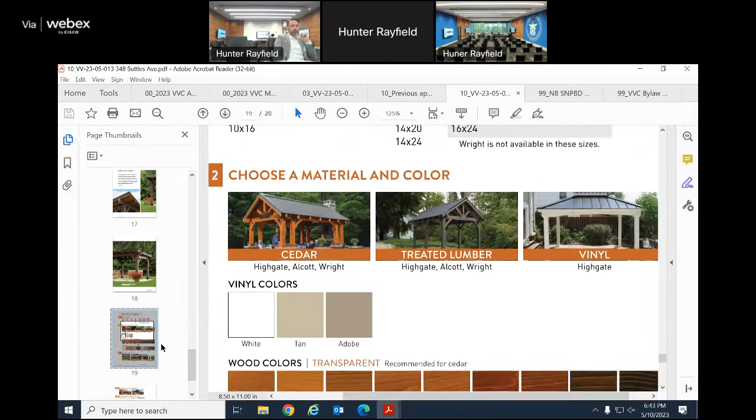So you'd rather see a 4x4 post or a 4x6? I think 4x4 would work, it just looks so chintzy to have one this big. Well, it's not just the size of the post - even the cut sheet has a post and beam seller with straight ones, arch ones, square ones, round ones, some with more detail that aren't just heavy timber construction framing. It's that heavy timber-esque framing that makes it look like it belongs out in a barnyard.

But also, what about the design of having the 1-12 sloped roof and that? I would say, show us, right? So if I get why you want it, I'm willing to consider that. I still think it's a little off, but I'll take a look at it regardless, though I think it'd be more palatable with smaller features. So if you're still looking at wanting to do the shed roof with smaller features, bring it to us so we can take a look at it and make a call at that point. So I wouldn't rule it out.

Yeah, and it might be finished - the edge might be finished by something. Wrapped in something? I mean, you're talking about like lattice, you mentioned. No, just there's a finished piece that's vertical before the roof. Some type of fascia piece, so that the rafters aren't exposed from the outside, you mean? Yes. Okay.

Also looking at the roof, there's different kinds of standing seam - if it's a true standing seam versus a kind that's more just an interlocking one. Again, it's the difference between what would be on a Victorian house or an Italianate house versus what's on ours. So again, it's a closed seam versus standing seam - the standing seam is more what you would see in this neighborhood, and that's one of the options. They have metal roofing and they call it legacy, and then they also have standing seam. Standing seam would be more what you would see on a building.

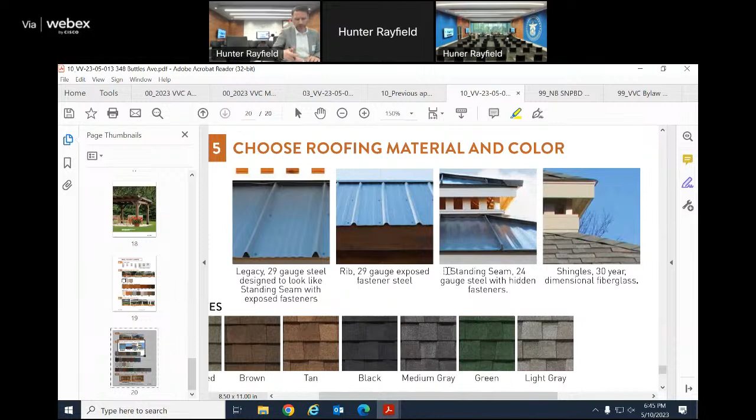But what about these brackets, the way that it's attached? Yeah, I don't see those as being appropriate. I don't know how else to - well, I don't build these, right? If they're more decorative rafter tails, again, it's all in the details. If it's a big chunk like this versus if it could be almost that same profile but with a curved scallop cut in it or something friendlier, it's changing the character of what it's looking like. It really is - the rafter tail discussion we had earlier. It is the vocabulary, it is the icing and decoration you put on this, because most things it's basic structure. This is just boiled down to the basics, and I think it needs to be a little bit more refined.

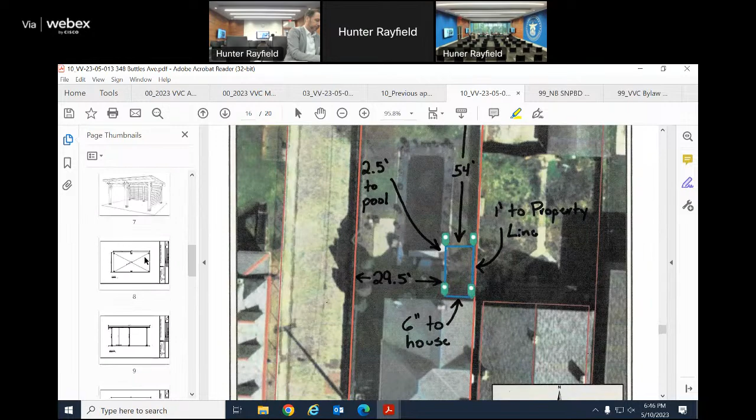So the last piece I wanted to address was the fence versus this. I still have that concern with you've got double walls. I'd suggest removing the back wall of whatever the structure is and using the fence as your screening, not putting it against the fence, so you don't have a double wall. Yeah, I think the issue was that height difference - that fence is only whatever, 6 foot tall, versus this privacy wall going all the way up to the top. I suppose one change could be a partial privacy, just a couple up at the top there, to get it down - if that would be acceptable, if you understand what I'm saying.

I wish there was more materiality there, not concrete. Meaning what, like pavers or brick?

Well, then I'd have to put the posts in the ground, so it scraps that. But you'd still have footers, making a concrete block footer to put it on, something like 4x4. So you'd do a concrete foundation, like a pier.

That would land each one of those posts, and then you'd be able to recess that slightly and kiss up against it with your materiality, then put pavers on top. But I have old pavers on the rest of it, so I'd have to rebuy matching pavers or it would look kind of strange.

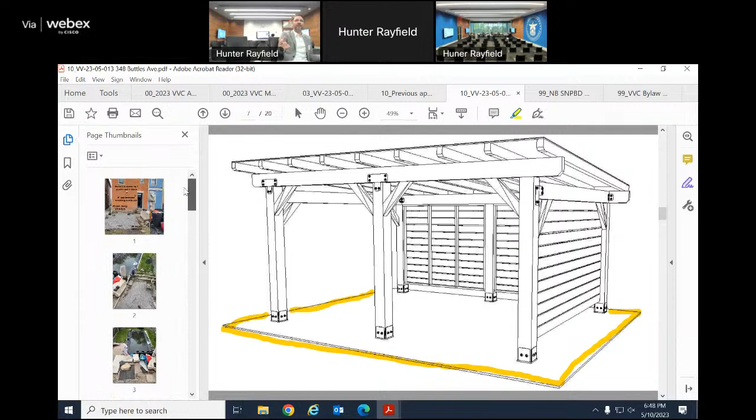I'd push back on that idea. There's existing pavers in the yard to keep in mind. With the concrete slab, if you put it right on the slab and it's not thickened, it could be an issue depending on the weight, because 8x8 posts aren't light. That's why they say we're gonna reinforce underneath in the corners.

So the footing that the piers are sitting on still needs to be isolated. It's not one continuous piece of concrete, it's gonna be isolated pieces.

I disagree. I think a specific border of pavers, and then new pavers, look just as fine next to old pavers. It's like a rug in another room versus a rug next to an old rug. That's the beauty of that backyard, you don't need all new pavers all around, just a nice clean edge on the old, and the new sits next to it.

The pool surround or coping is concrete. So there is concrete already. If it were finished nicely, I'm not opposed to the concrete there, especially looking at the entire composition, since you already have pavers and a section of concrete. But I do agree some pavers would be nice in that area, something with a little more texture. Still, looking at the totality, the concrete isn't out of the question.

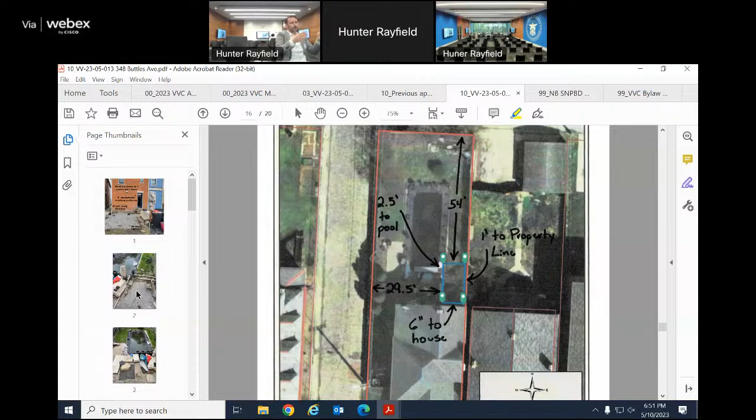You can look at the sizing of it, it's basically the size of this pavilion, and there's an overhang on the roof, so it's just a little bigger than the pavilion. If you look at that corner there, that's essentially about where it is. The concrete would surround that, and the straight line would start right where that first paver is.

So is the pier going to be sitting on that existing concrete? That would have to sit on there. Can I interrupt?

So this is why we need a site plan. We're sitting here describing a site plan between each other. The previous application does show, I think, maybe what you're kind of describing there. It is an awkward situation, and I think it draws attention to the fact that it needs to be resolved somehow, but it's not just as simple as concrete versus paver, it's how it all is interacting with existing.

There you go, that's right. So that is pretty much the size, that is the size that we're doing right now. It just doesn't have that bump. That's just a square, so that existing little other piece doesn't exist.

So a site plan, something like this, showing exactly where the application posts go, in lieu of the photograph. The photograph was helpful, big picture, but you can see that there's a lot of details related to how some of these materials come together. So the black and white drawing, kind of zoomed in a little bit more, I think just kind of helps define some of those. And so I think that's what the team is responding to.

I was just trying not to hire an architect. No, you don't need an architect, you just need to sit down with a pad of graph paper. You could start basically with what you got here, okay, mark it up.

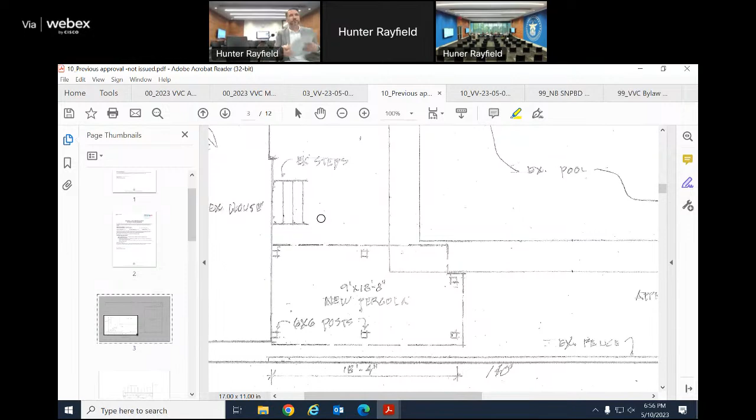Not unless you're gonna throw me a really odd curveball. No, I mean it's just the same fence, because it needs to look the same as the rest of the thing. So that's what we're doing. Perfect, yeah, thank you sir for your time. Yeah, if I do call this guy I'm trying to get my money back. I don't know how that's gonna go, but if I do want to keep going with it, then I would have to come back to the next meeting.

And have these changes made if that's possible, drawings of everything, for these guys, yeah. And just as a quick note, if you wanna come back for the June meeting, you have a week from today to submit new materials, and if not we can look at like July or August. Oh so the design changes we're talking about, I would only have a week to get done. Oh, yeah, this is just gonna take too long. So I gotta get my pool back, I gotta get the thing open. So I guess that's it. Good luck, thank you sir, thanks, thank you.

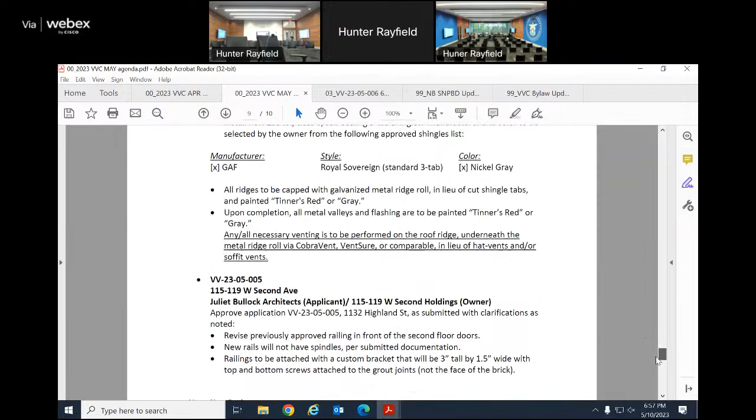So it was still an agreement with Victorian Village, so that is something I want on the record. And the window that they had is not on the approved list. Yeah, and I had thought it was. And I thought we were gonna add that window, so they had, that association had two options. Isn't that what we talked about in our business meeting? So we have, but we can't add that window to the approved windows list. And since it's not on the approved windows list, and since that agreement is part of a larger area, I don't feel comfortable staff approving it.

Yeah, so neither one of you are wrong, that's what I'm saying. Don't try to be the peacemaker here. I'm being serious, but I didn't realize that this was an oddball window.